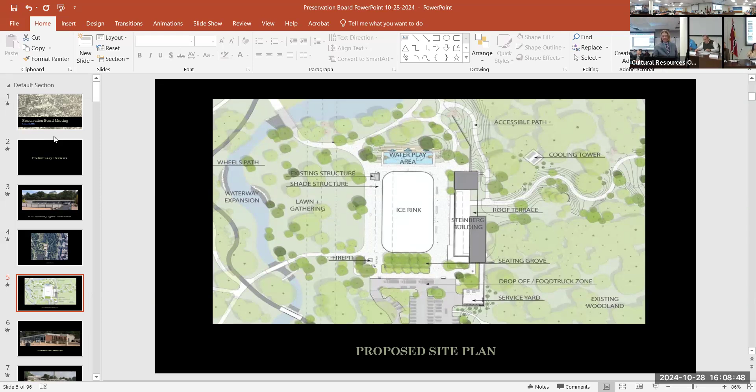Commissioners, do I hear a motion? I move that the Preservation Board grant preliminary approval to renovate the Steinberg Pavilion and surrounding site. Second. Any discussion? Hearing none, I'll call a roll. Commissioner Hammaker, do you vote yes or no? Yes. Commissioner Colleen, yes or no? Yes. Alderman Narayan, yes or no? Yes. Commissioner Richardson, yes or no? Yes. Chair votes yes, there are 5 yeses. It is approved. Congratulations.

Thank you all for coming. Thank you all for coming. I know.

Commissioners, we do not currently have a quorum present for agenda item B or C. I'm going to call agenda item D. D, D as in dog. As in dog. There, let me get you. Wait. So which, second? Let's see, we're here D, okay. Yes. Okay.

This is a preliminary review application to review the alterations and new construction proposed for this site at 4490 to 94 Lindell, also known as the Optimist International Club. As many of you board members will probably remember, this is far from the first proposal to reuse this building, which is a difficult concept in its floor plan and its site arrangement. But having said that, this is a building by Schwarz and Van Hoefen, and it was selected as one of the top 25 mid-century modern structures in the survey our office completed in 2013. So it's an important building, and its preservation is very critical to the Central West End and to the city as a whole. As I said, there were many other proposals for it that were unable to be successful. And so we are hoping that this one is different.

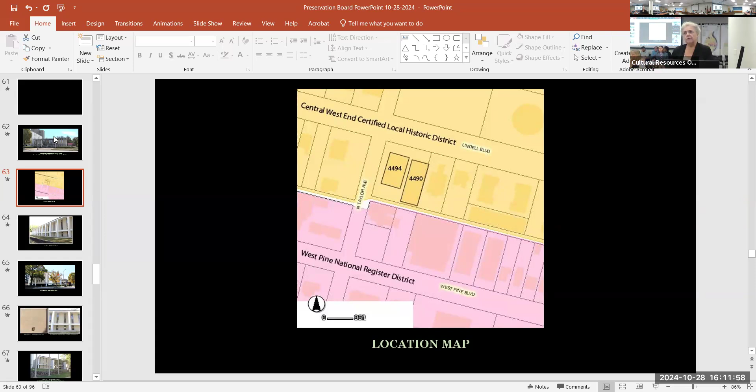But also having said that, I have to say that there are certain elements of the proposal that do not correspond with the Central West End Historic District standards, nor with the preservation review requirements, because this is in a preservation review zone as well. Let's see if I can hit the right button this time. Nope, I never can. This is the location. Now, the building on the right, which is 4490, is the tower, and that was built in 1978 and is not as distinguished as the original building at the corner at 4494. So its demolition is inconsequential.

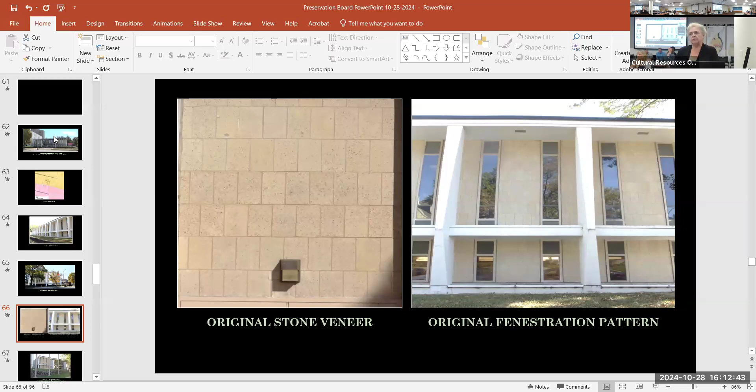The current building is sheathed in a stone veneer, and as you can see, the ribs are partitioned off individual bays with narrow slot windows. That's where the main alterations are going to happen, both on the front and on the west facade.

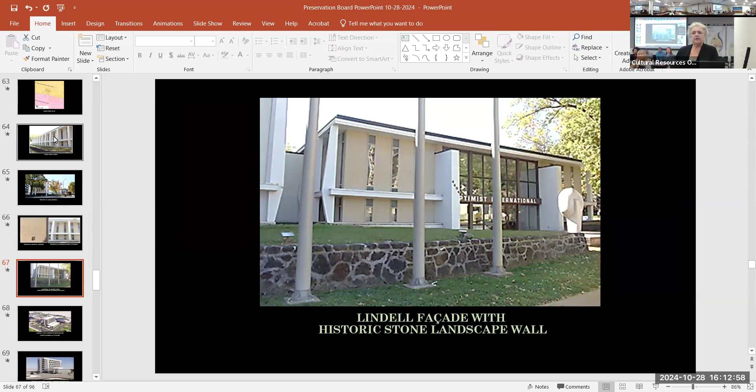This is the front. The stone wall that you see is consistent with the design, and parts of that will be retained in the alterations.

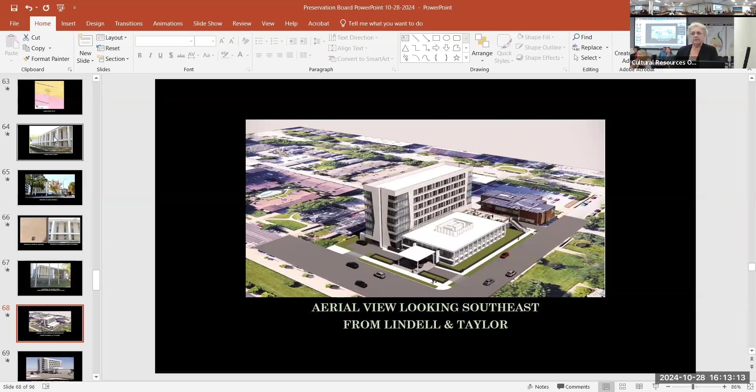I'm not going to dwell on these because the applicant has a presentation, but this is the proposal. It'll be a new tower on the east side of the property and changes to both the front and the west side, which are street elevations.

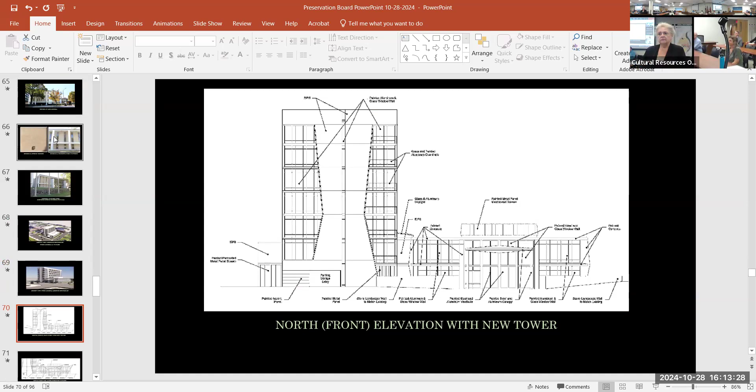I'm sorry these didn't copy very well, but what's proposed is to remove the wall space between the ribs and to glaze it instead. That would be on both elevations.

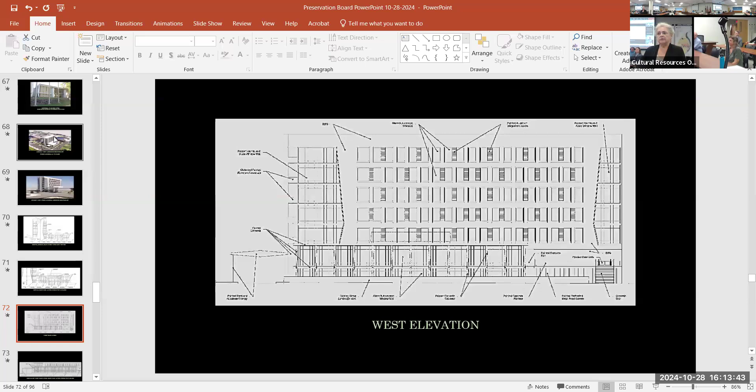So the staff is recommending denial because it really has to be under the standards as they are now. But we are supporting it as a critical means of saving this very important building. So it's a quasi denial.

Questions? And you go through the legislation. I'm sorry, will you go through the legislation in what way exactly? Does it comply, or doesn't it comply? Okay.

It's located in a preservation review district. The architectural quality is high merit. Its condition appears to be sound under the definition of the ordinance. The neighborhood impact, this is one of the strongest sites in the city, and it has many examples of mid-century modern with which this building is compatible.

Reuse potential, however, is not high, given the unusual conditions of the building itself. It was just built as a fraternity organization.

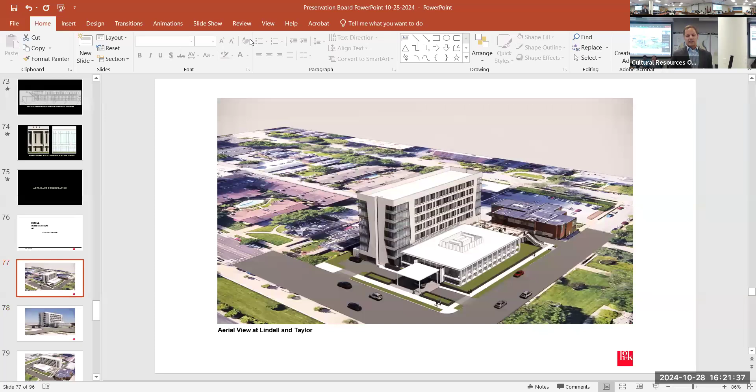So you have the pavilion, and the Cultural Resources Office staff asked us to look at some other things. The 2015 proposal had done some fritted glass, some different obscurities on the glass to replicate some of the void and solid of the current building.

We're simply replicating the pattern. I believe it's a 20 inch, 44 inch, 20 inch, 44 inch spacing between windows now. The window panels are 20, the spaces in between are 44. We're simply proposing to replicate all of that in the glass fenestration pattern, in the muntin pattern.

We did get a request to explore opacity, color, things like that, to further echo what was part of the original design. Where we landed is that it's better, purer. The simplest expression is the best expression. One color, two materials, as simple as possible, is closest to what we want to do, and closest to giving us the marketing message we want, which is mid-century cool.

Moving from that to the rest of the program.

I have a desktop, I don't know how these laptops work. There it is. It's got minimized. Yep, should be okay. Yep, we're good. No, it was paused. Okay, all right, yeah, okay, I'll touch nothing else.

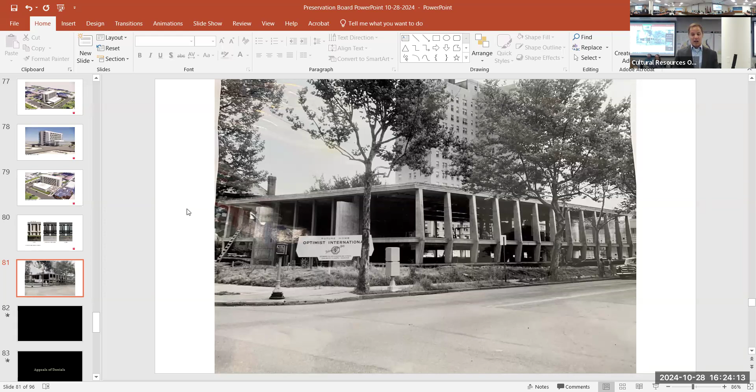So the pavilion is glass and concrete, two colors, the glass color and the concrete color on the raised podium. Then to the east of it, we're proposing a new tower building. It's 5 stick-built floors over 2 poured concrete floors, designed to be as efficient as we can get it.

From the street, because of how the parking is ramped, the parking ramps up from Lindell. Today there's a curb cut on Lindell that leads into a door in the front of the building, and the parking goes down from Lindell. We propose to use the same curb cut, put an opening into our building at approximately the same location, but ramp up, with another ramp down from the alley. That gives us 2 ramps, but it also gives us space at the front of the second floor for additional rooms. So even though it's technically 5 over 2 stick-built over concrete, it looks from Lindell like 6 over 1. We're getting 6 floors of guest rooms over 1 floor of garage from Lindell.

The design is meant to echo the painted concrete of the pavilion, but with sort of a modern take. It's kind of hard to see on the drawing, but where these shapes are cut into the white block, imagine this white block that we've cut some fenestration into, there is a dark colored edge, the rind, the architect calls it, that I think is very of the moment. This is a 2024 design. The angle detail on the facade is approximately the same angles as the colonnade around the perimeter of the original building. So I think it does a nice job of echoing components of the pavilion while still being a very today design.

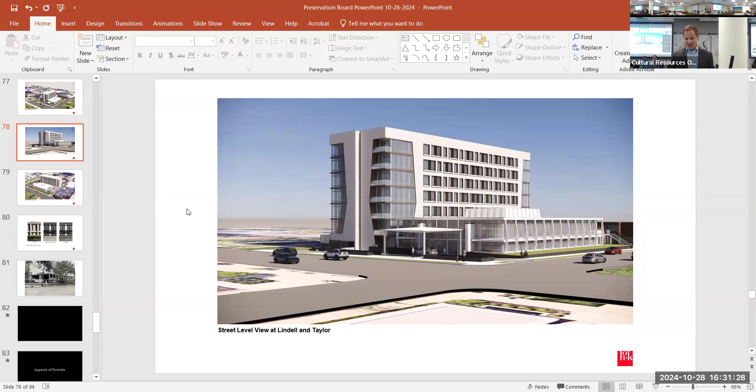Working around to the back of the building is an extension of the upper pavilion floor. Right now the floors penetrate the facade on 3 sides. The colonnade is outset from the facade, and the floors run out to it. That upper floor, we propose to pull out all the way to the alley on the back of the building, set back from the facade so there's no mistaking what's historic and what's not. That would serve as an amenity deck for the hotel, as well as outdoor dining for any food and beverage inside.

We placed a big staircase you see very prominently there. The lava rock wall shown actually turns at that location. We're proposing to leave the lava rock wall where it is now and erect this staircase going up to the raised terrace behind it. So we've got the pavilion, the tower, the canopy, and the terrace.

That's all I have, unless you have questions. Commissioners, questions?

So what's the deal with the stairs? They're for access to the amenity deck? Yeah, my thinking is that that'll be the main entrance to the restaurant.

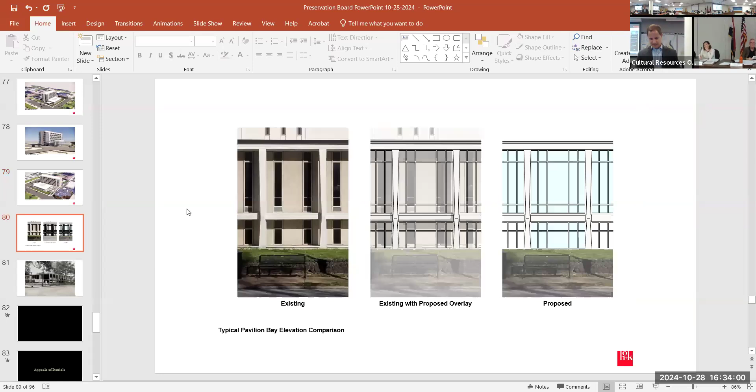So the first level underneath that deck is not part of the restaurant? Correct. Yeah, if you want to see that, I've got floor plans. Oh, maybe not. Yeah, I get it. It seems odd, so I'm just trying to figure out why. Oh, it's not here. Okay.

The lower level of the pavilion has rooms facing Taylor, guest rooms. And then on the other side of the building, facing into the tower, is just back of house space - the fitness center, laundry, and kitchen are on the lower level. There's a pantry on the second level to serve that upper level restaurant. It's logistically a little complicated, but seemed like the best way to get done what we want to get done.

The other question - I just want to confirm that the variance is necessary for the curb cut to create that front vehicle access. You've gotten those through with the form-based code. All variances we needed, there was the curb cut, and there was one for materials because neither EIFS nor curtain wall glass is an approved primary facade material.

And the use—hotel is not a permitted use. Those were all approved by the Board of Adjustment in September. Okay, thank you.

Do you have a flag for this hotel yet? Do you have a brand? No, it's modeled around—we had to understand what was possible in order to know whether there's a deal here or not. It doesn't make sense to design a project that doesn't make economic sense. So it was designed as a major chain soft brand. But I'm talking to people now who would do what they call a lifestyle extended stay. I'm talking to people who would do a completely independent hotel. We don't really know until someone steps up and says, let's do it.

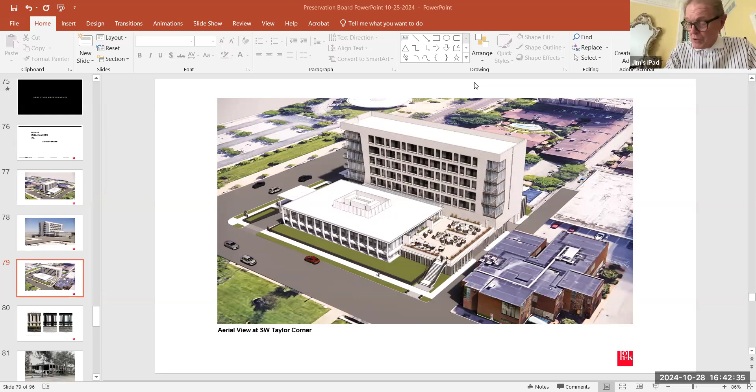We remain concerned about potential traffic issues resulting from the proposed introduction of a new curb cut on Taylor Avenue, shown in the middle of the rendering before you, middle left, immediately south of the Lindell Boulevard intersection. We encourage the developer to further consider providing vehicular access from Lindell instead.

What we're concerned about is that that's a point of ingress only. What we're imagining is that cars will be headed southbound on Taylor, intending to turn left across the northbound lane to enter the hotel property, thereby stacking cars up into the intersection at Lindell.

We do not have a specific proposal about how to address the issue successfully by coming in from Lindell, but we believe it's possible, and we think that investigation of it should be required.

So in conclusion, the committee recommends favorable action on this appeal, subject to final review and approval by Cultural Resources Office of permit drawings and specifications.

I want to take just another minute to extend compliments and appreciation to the Cultural Resources Office staff for their consistent application of the CWE Historic District standards and diligent efforts to preserve and enhance the district. We thank you for that. And that concludes my testimony.

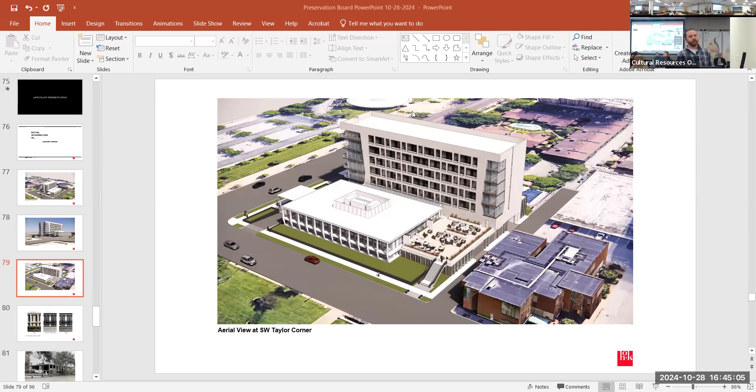The entire stretch of Lindell Boulevard between Kingshighway and Vandeventer has undergone several changes throughout the years. You have a combined streetscape of buildings starting around 1888 and going all the way up through the 20th century. Adding a new building in place of the 1978 addition would not significantly alter the streetscape in a way that it hadn't already been altered due to construction of other buildings during the mid-century.

The only concern that I would have is the eligibility to the National Register for the main pavilion building, because from the proposal, with removing the walls and adding glass and things like that, it appears that this building would no longer be eligible for the National Register. And for me, that raises some concern. So overall, I would think that at least part of the proposal is good, but it should probably go back to the drawing board to consider ways in which the National Register eligibility could be retained.

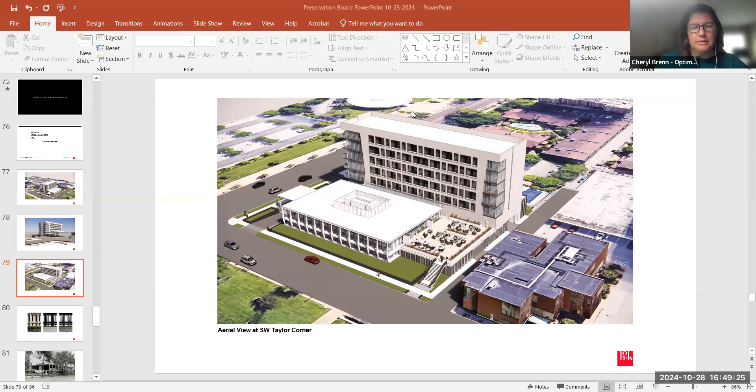Commissioners, this concludes the testimony. We have one more, sir. So we have one more. Hank Weber wants to speak. This better be about this project. This shouldn't be that 50-minute presentation you were going to give me earlier. No, it's about this project. I've been moved by this proposal.

Go ahead. My name's Hank Weber, a 16-year resident of the Central West End. I am a confirmed historic preservationist. We've renovated a historic house in the Central West End with the enthusiastic support of the CRO and their commission. I renovated 1 million square feet on the Danforth campus in my 15 years as chief operating officer at Washington University, and I've been by this site, I just estimated, about 3,000 times. And fundamentally, I support this.

I support it for three reasons. First, I think we face a real threat. This building has not been an asset to the Central West End, even under Optimus ownership, for recent years. As they noted, they have 20 employees on this site. This is not adding to neighborhood vitality, it's not adding to activity.

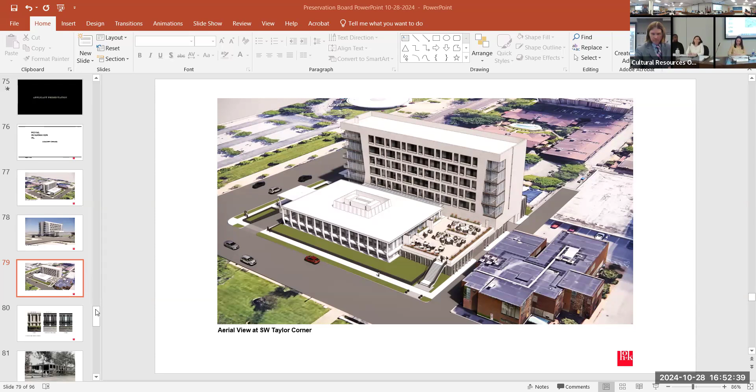Commissioner, a motion. I move that the Preservation Board grant preliminary approval of the proposed demolitions and alterations and building permit. Second. For discussion, we'll go to call on that. Sure, second.

Discussion, Commissioner Richardson? Well, I would add some further conditions to it, considering that it was basically granting a variance to the Preservation Review District standards because it doesn't meet most of them, and we're doing this because of neighborhood effect and reuse potential. So I would add that no demo permit or permit for alteration be granted until they applied for and paid for a building permit, until they closed on the property, until they close on their financing, and until they have a hotel franchise agreement or other evidence of a hotel operator for the project.

Sounds good to me. I don't know that I like the very last part about the hotel franchise. I'll second it -- and I've already seconded.

Oh, is that true? Well, I threw that in there because it's going to be a hotel, and I think it makes sense that it needs to get an operating permit, so a franchisee, or if it's an independent.

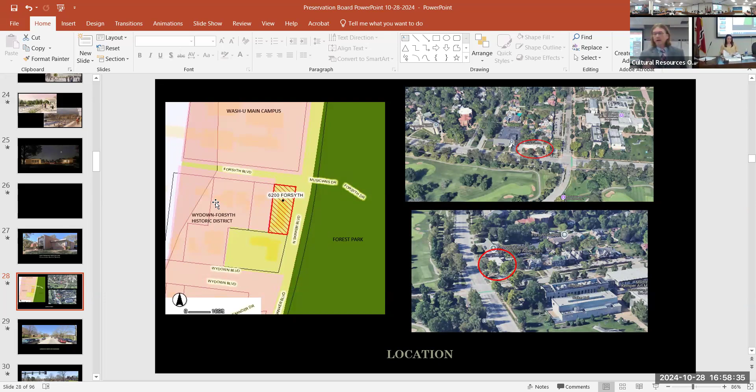It's right across from Forest Park. Looking west on the upper right, you can see looking down Forsyth. It's right adjacent to the campus to the south. Long row of buildings for the Forsyth School, which you all have a letter of support from, as well as a letter of support from Alderman Clark Hubbard for the project, for the site.

Some context at the street level, looking north on Skinker. The church in question is this one story building. There's an existing church to the south, and here's the site along Forest Park. Looking south on Skinker, here is the church in question. It has a service parking lot at the corner that served the former church. And then looking from the park west down Forsyth, this is the church in question.

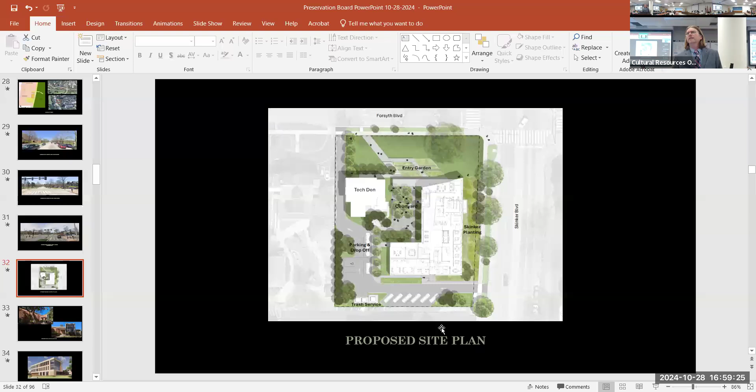This is the proposal. I don't want to get too deep into it, I'll just show you the stuff. They have a detailed presentation later, but I'll run through some quick slides here. This is the proposed site plan. It lines with the building on Forsyth. You can see the massing of the building.

It's a fine building, but overall, what's being proposed exceeds what we're losing. Staff please.

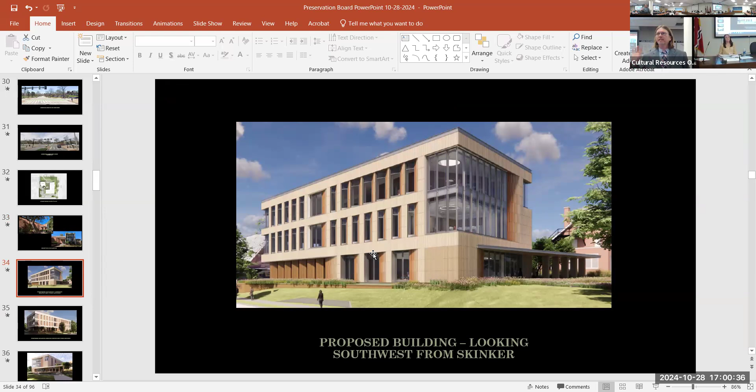This is the proposed building looking from Skinker to the southwest. I want to note the building material is terracotta and brick, so it's high quality materials, fits well with the site and the adjacent historic buildings.

Just looking northwest from Skinker. I want to say at the outset, this review has been around for a while. Jan and Meg, my predecessor, worked with the design team to craft the design to fit the site better. They were wonderful to work with. So this is an evolution of design that staff saw previously.

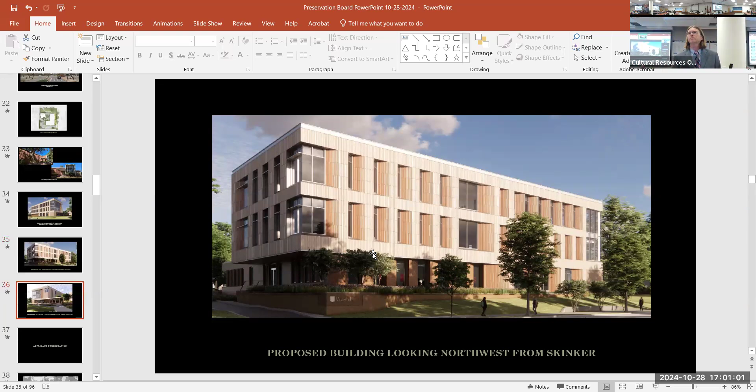This is looking from Forsyth. It's the entrance to the building.

Going to the ordinance, we believe that it complies with the majority of the PRD ordinance. The only thing it does not comply with would be zoning. This area is proposed to what's called a CUP, a community unit plan. WashU has a CUP for their site, and this will eventually be part of that CUP that is part of the university site. Speaking with zoning, they felt that since that's a pretty large overlay zoning, this step should come first, to make sure they're okay with the demolition. That will be seen later on down the line. So this building would comply with that overlay zoning.

So right now it does not comply. The plan is to amend the CUP to incorporate this site. Beyond that, it is also a sound structure under the ordinance.

You were all given a copy of a condition report from the applicant. It has some flooding issues, and some outdated issues with its services and systems. But overall, it's a sound building. We believe that it fits the site well. Again, we do contend that the loss of the building is exceeded by what's going to be built on the site. So staff recommends preliminary approval of the demolition and construction, subject to a permit being pulled and issued.

So any questions for me? Yep. Is the applicant present? Yes.

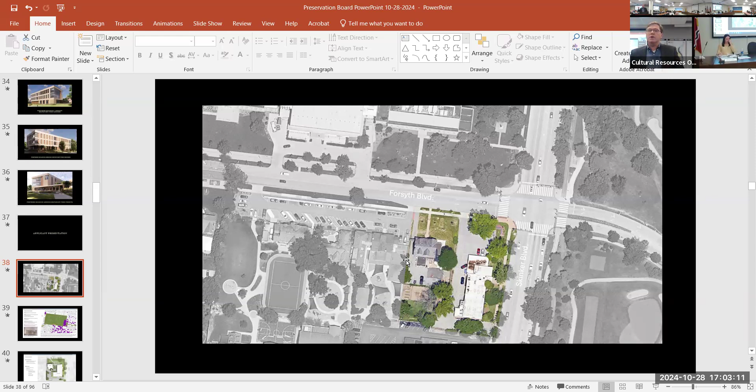We understand the sensitivity around Marcel Boulicault's project here. We do understand that in the mid-century modern survey, this project was passed over as a notable building. I just want to put that understanding out there, that we know lots of buildings were recognized, but this building was not part of that survey.

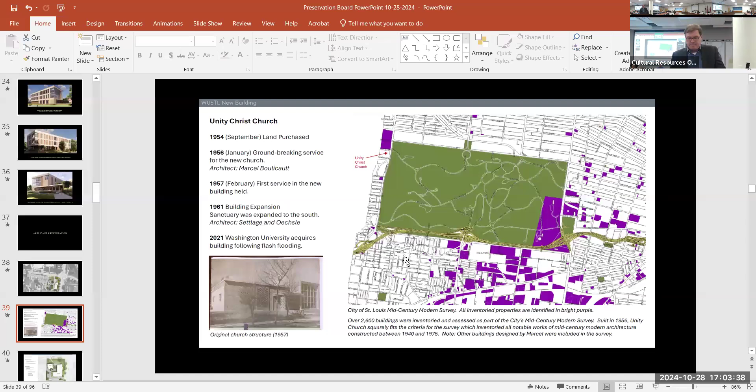So on the project, we're going to share consolidated property with the property at 6214 Forsyth. WashU calls it the Tech Den. We're not changing the use or altering that building at all. There's one thing we do have to do: there is a brick archway over the drive that is very limiting, very low. We can't get an emergency vehicle underneath it, or any kind of large vehicle at all. So we have to remove that from the project next to the Tech Den, but we're not changing the use or occupancy of it.

Our project is proposing to demolish the Unity Church that's on the site. This project will have administrative and student space in it, essentially office space and some meeting and conferencing rooms. There's also a courtyard between the Tech Den and the new building that will be used both informally, during lunch or during the day when people can work out there, students can work out there, and also occasionally for small events in the courtyard.

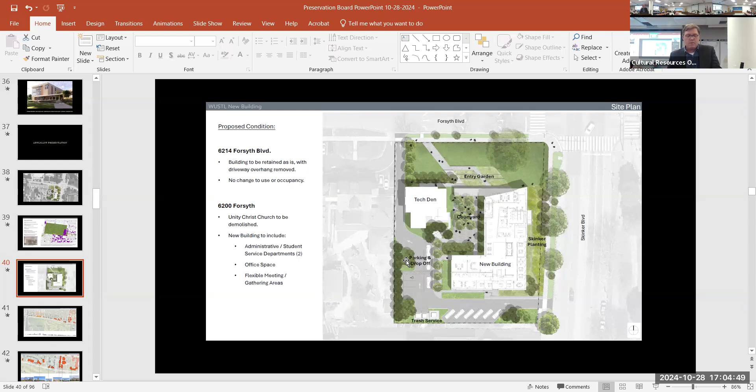When we designed this project, we really wanted to fully appreciate and understand how important Skinker Boulevard is to the city. That is the edge to the park. And as an edge to the park, it both defines the park but also becomes a window into the fabric of the architecture of the city.

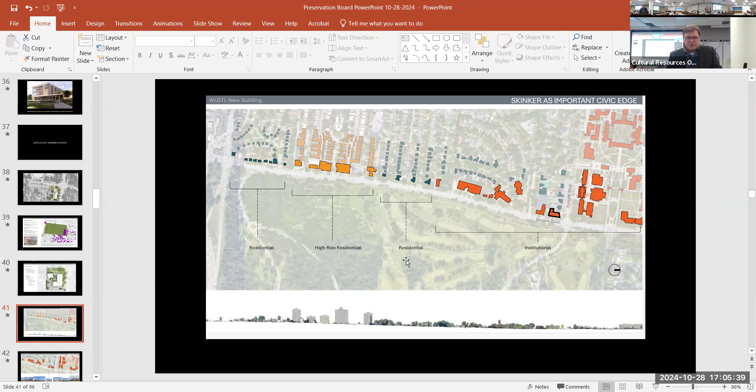This plan, which looks along Skinker, acknowledges that there are several different zones along the park. There's single-family residential, high-rise residential, multifamily residential in the DeMun area, and then a whole institutional zone along the park, and we're squarely in the middle of that. There's several churches, the Missouri Historical Society, Washington University, and our building sits among those. So really understanding that full context is important.

Our building also turns the corner, and on the backside, the west side, which is plan north in this plan, it's also residential. So our building is trying to ground itself in the institutional buildings along Skinker, but also acknowledge the presence of the residential scale and material palette to the west of it.

These are some photographs of the buildings that this building will sit amongst. You can see the Missouri Historical Society, the Memorial Presbyterian Church, the Seventh-day Adventist Church, which will be right next to us, and then Bixby Hall and the Washington University projects along Skinker.

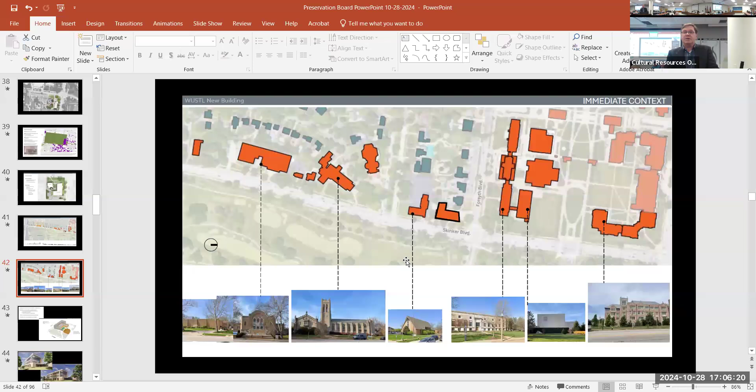We really wanted to do four things in terms of how this responds to the city. First of all, we wanted to create institutional stature to the building.

This is an important 100-year building for WashU. We wanted to make sure it has the stature of an institutional building, but also we wanted to bring the scale down. We noticed in several of the buildings, the Presbyterian Church for instance, it's got a significant presence, but also when you get close to it, there's detail that's rich and inviting and humane and welcoming. We wanted to do the same thing.

We also really wanted the building to be of its own time while relating to buildings that preceded it, so really wanted it to be of its context. That's both material quality and appearance, but also this is a highly sustainable building, responding to environmental pressures. We wanted it to be of its time in that it's responding to the environment in a very serious and responsible way.

And then finally, we really wanted it to become an asset on Skinker, continuing that institutional edge to Skinker that makes it vibrant and gives St. Louis character.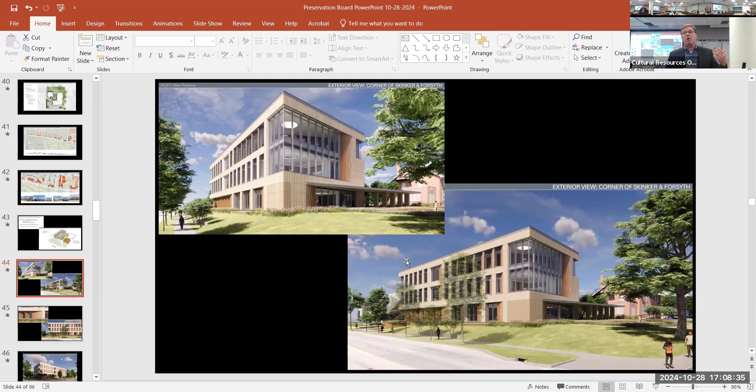As Bob mentioned, the palette is terracotta, which has historically been used quite a lot in St. Louis. It's a clay product like bricks, so it relates naturally to the brick palette you see in St. Louis. Just down Skinker, several of the high-rise buildings have terracotta at the base, and what's remarkable is when you go look at those bases, they look as if they're 10 years old. Terracotta performs extremely well, it's very durable, and we think it's an appropriate material that can respond to the limestone and brick in coloration and substance on Skinker, but will last a long time.

We're also using brick. There's a one-story piece that relates to the scale of the former residences on our property and the other residences nearby — that's the tail that comes around. That's a brick piece, and we're using iron spot brick. You'll see in a bit some details that show both a sense of care with the use of brick, not just developer brick but institutional quality detailing, and also harken back to the original building that had a brick screen in front of it.

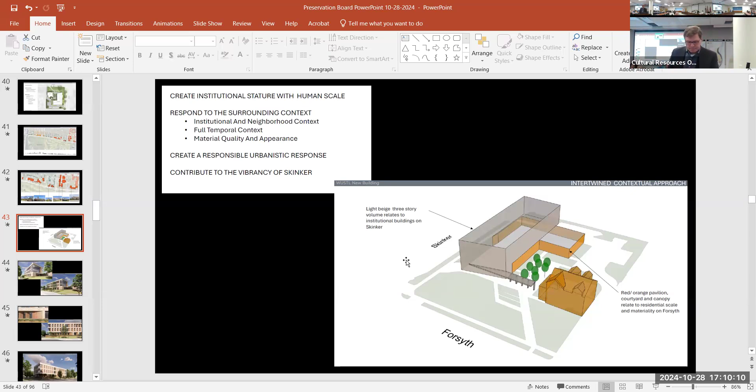And then you can see in the brick how it's coursed, which harkens to the overall strategy of the fenestration of the building, where the bricks are kind of angled into the facade.

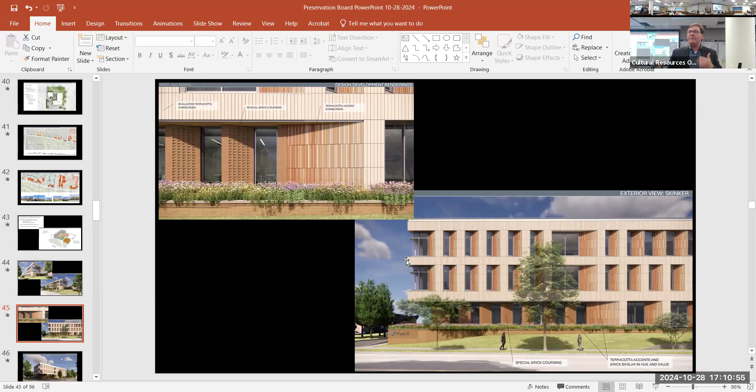At the edge, we have to retain some earth, so there's a brick retaining wall. There'll be some signage there, and a planting bed along the edge of the building. This is the view looking towards the northwest, where we have a larger conference room, some corner windows, and a service entry on the backside.

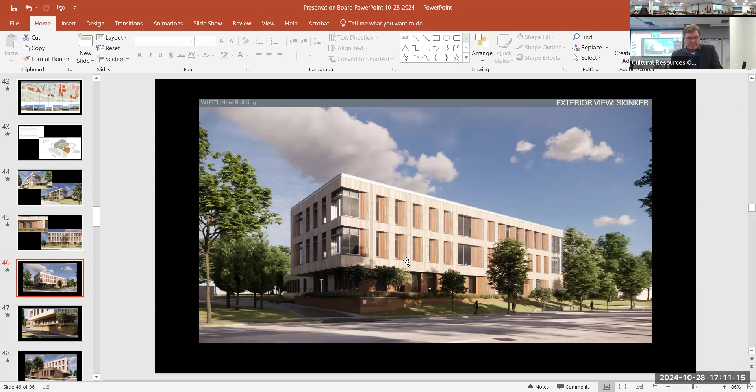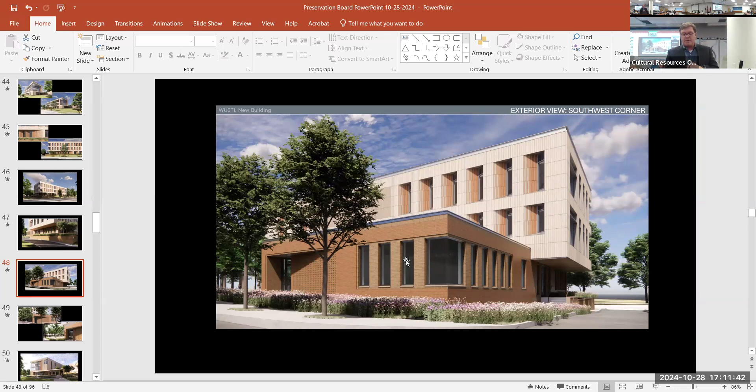Just a close-up of some of the brick detailing and coursework. This is swinging around—we're inside the site. There'll be a drop-off here, a secondary entry to the building, and you can see the one-story brick volume sliding out from underneath the three-story building. Some more views of the brick detailing. There'll be a lovely garden in the middle with a bosque of trees.

This is really where most people will enter the building, coming from the campus. The whole entry is oriented back towards the university, and the front of the facade is angled back to the university for two reasons: one is to improve the solar orientation so you can have nice clear glass without penalty from solar heat gain, and also the people in those rooms will have a view right back to Brookings Hall and the greater university.

There's a canopy that welcomes you to the building, but also softly contains the courtyard behind it, and pulls you into the front entry. And that's all I've got to show you.

Are there any questions, commissioners? One question—the logic behind putting the pedestrian path this way, angling the facade west, actually angles pedestrians away from the crosswalk. I'm just curious about the thought on that, because this is angling them further from the Lindell side.

Right, so people are not coming from the park—they are coming from the university. The majority of people are actually coming from the west, in fact about 99% of the people coming to this building are coming from the west. And the university wants them to park at the university, not in the park.

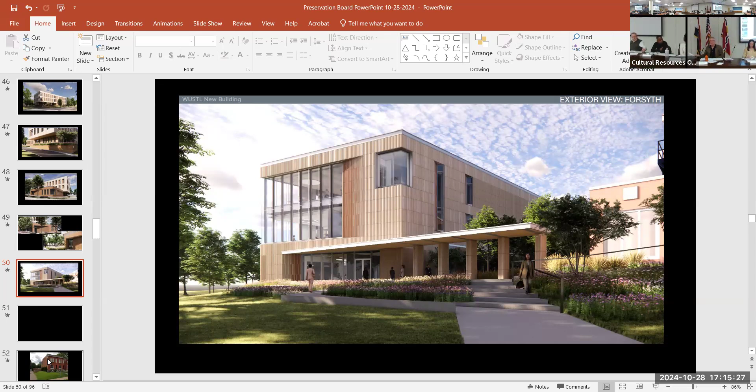I don't have anybody on my sheet for agenda item C. In the grid, I have it here. No, Max is online, the architect is online. Max, are you awake? Yep, I'm here. Max, yeah, Max, your architect is online. Commissioner, we're going to take a 5-minute break. All right, sorry Max, 5 minutes. Okay, back to bed, yes.

Yes. Right now. So. Yeah, so don't—you're gonna go the other one now. Normally.

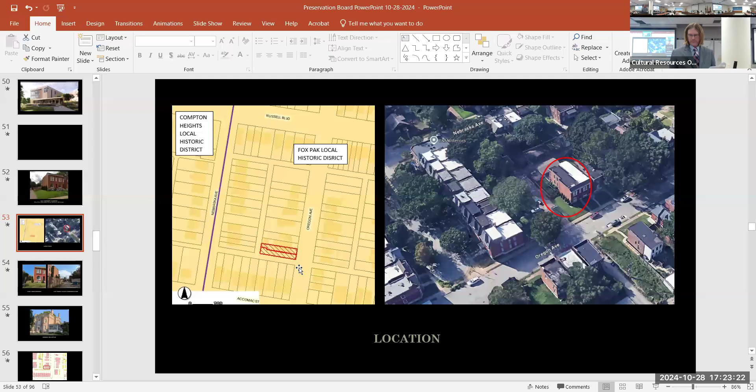So here's the location. We're just to the east of the Compton Heights Local District, which is Nebraska, the dividing line. And we're here at the alley on the west side of Oregon, south of Russell. And here's an aerial shot showing the parcel. Here's the view from the street. Again, you'll see a shot showing the proposal of this area.

And it's the alley looking towards the street. This window right here, you can see it. This is actually one of these two—it was actually a door at one time. Historically, there was a porch back here when there was a building that was placed here. So there was actually a porch and there's a door at the side.

So when the design came in, we suggested they try to find an example of an existing frame porch as a basis for the design. Driving around the area, they went next door to Compton Heights and found some precedents for having one-story side porches. This is one - even though it's a grand, high-style building, the concept idea of having this is out there. This is the 1909 Sanborn.

This shows you the building. It was there, so yeah, there's the cutout you see. But this was long ago demolished. Kind of cool.

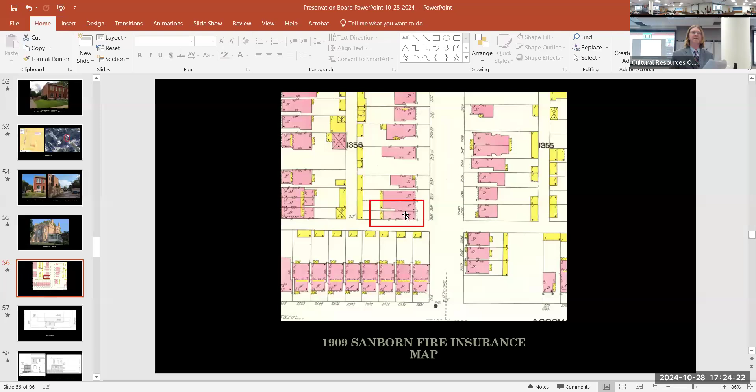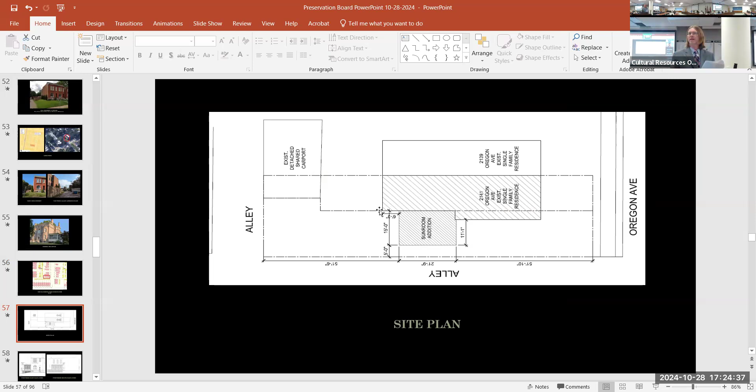So this is the site plan, the proposed addition. See, it'll come off where the building sets back, comes out about 11 feet, and goes back near the rear of the property. This is the view from the street looking back.

We kind of minimized some of the really high style elements you see on the side porch, asked for better materials, and tweaked things like adding a lattice screen and a frame at the bottom, which you would see a lot of times. Given that odd slope that's there, having a heavy masonry foundation would look a little different, and porches like this would often have a lattice screen. But overall, fenestration lines up with the first floor.

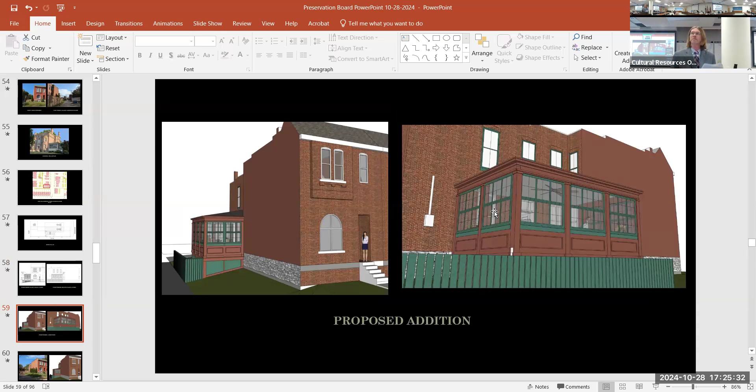You did receive a letter from Fox Park supporting the request for variance, given a few conditions. They want to make sure the southeast facades will be detailed in the same materials and configuration regardless of the proposed fence condition. The concern is the fence is blocking the lower portion of the addition, so they'd like to see the lattice screen carried over to this side as well. They want to make sure CRO does the usual detailing to ensure compliance.

That would be in your motion - if you choose to approve it, you can stipulate that you work with CRO on the finer details. They want to make sure the windows in the front are compliant with section 203 of their ordinance, having simple double hung windows.

I was unaware, and Max maybe can elaborate on this - there was a possibility of having really large double hung windows here, Max. We can probably get into that in a minute, but they just want standard, simple double hung windows along here. And then also they mentioned the lattice we've discussed before.

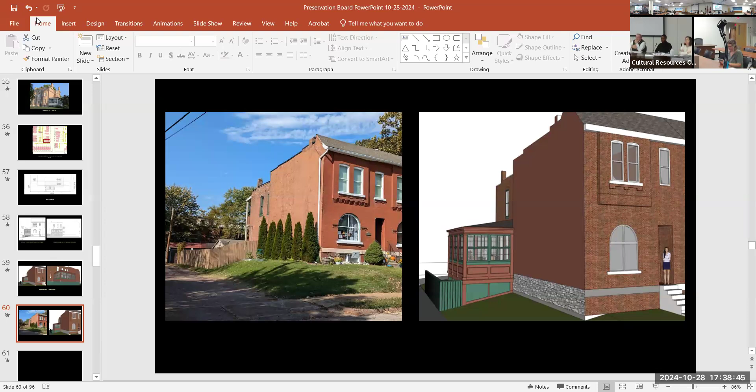So that part's possible. What got me is the neighborhood standards—they wrote them saying it should have a flat roof, right, and a parapet should be a little taller. It should have a flat roof. This building has a flat roof. I think the design should have a flat roof. And I agree with that.

The motion on the floor has been made and seconded. Any further discussion? Hearing none, I'm going to call a roll. Commissioner Hamilton, do you vote yes or no? Yes. Commissioner Trellini, do you vote yes or no? Yes.

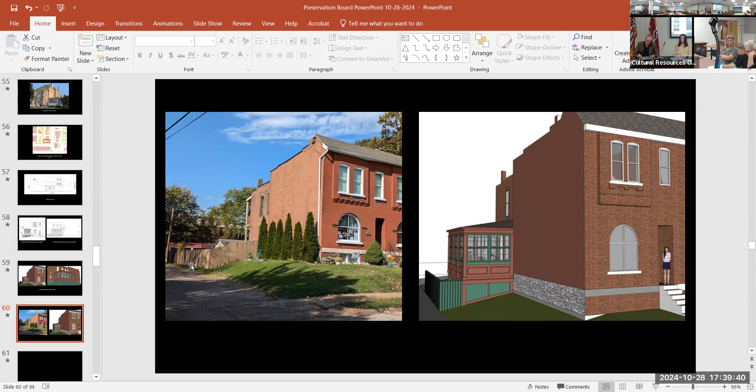Commissioner Richardson, do you vote yes or no? Yes. Commissioner Robinson, do you vote yes or no? Yes. Chair votes yes, there are 5 yeses. The motion carries.

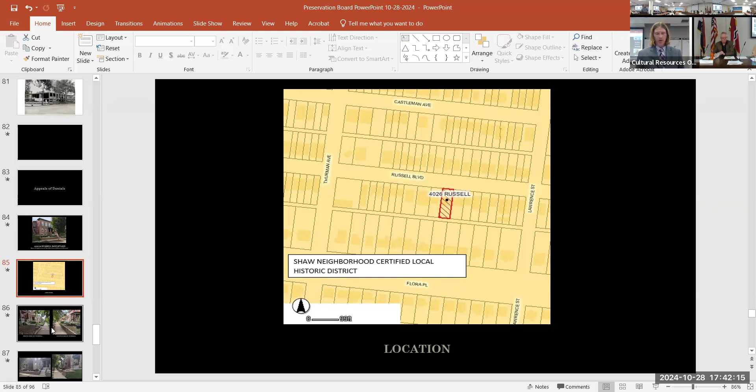So this is the site, just in the middle of the block between Thurman and Lawrence. I will say, at street level, this block of Russell does have several retaining walls on it already. I've looked into them, and I didn't see any that were approved by us or received a variance. So these are walls that have been around for a long time, or were put up and were not noticed over time.

This is a detail of the current wall. Are these two walls, right? They're two walls. We're calling it one wall, but they're two separate walls. This is the current condition. Walls were constructed and they were landscaped. This shows you the site previous and the current condition.

You do have a letter of support from the Shaw Neighborhood Improvement Association. They are in support of the applicant's request for a variance. But staff recommends that the board uphold the denial of the permit because the wall is not compliant with standards. Any questions for me? There's been some spirited discussion with the neighborhood. I'm going to go talk to the Shaw group in the coming months. They're having discussions about how they want to address their own code, so I will note that's ongoing.

In any discussion we've overheard, or any discussions with the appellant, do you have any clue as to what the reason for the variance might be? From the applicant himself, no. They just want to keep it because they put it up and expended the money on the project. I believe they said it's also a north-facing slope, so it doesn't get enough sun, they can see that. So there are several reasons why they support it. They also said there are several similar walls in the area already, so that's why they see it as okay. So they went without a permit. Correct.

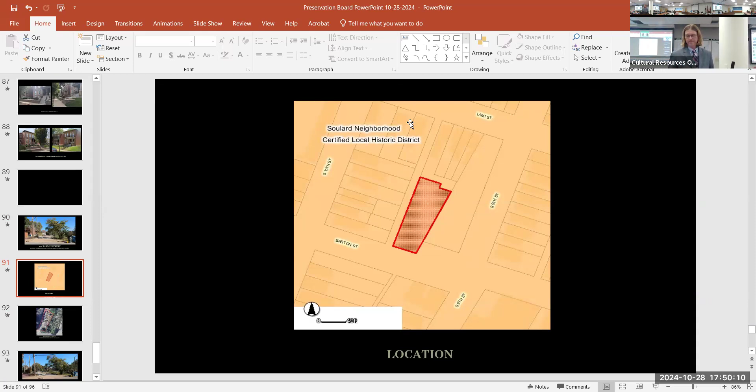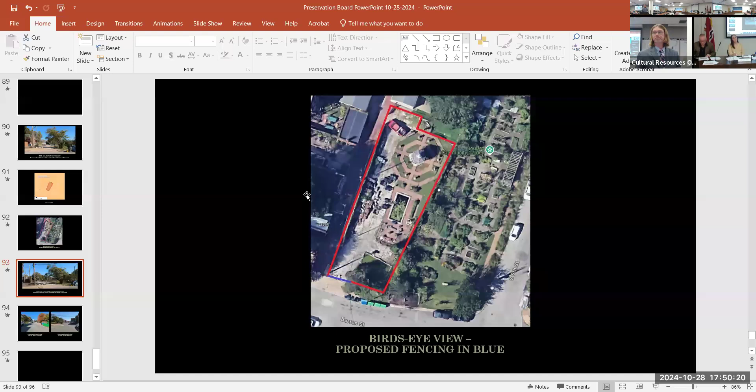So quickly, here's the parcel. The owner lives kind of over this way, up towards Lami. This is a bird's eye view of the site, and the fencing you see is down here, but the rest is already chain link. Another shot of the fence, shot of the site. Context looking to the west, the site's right over here. And again, this is the site looking this way, to the east on Barton.

So again, that being said, chain link fencing is not allowed at public facades, that's why it's not compliant. You were given a letter from the SRG's Historic Code and Zoning Compliance Committee, who did not support the request for a variance, so you do have that on record. We do not have anything from the elected official on the site. Any questions? I recommend that the board uphold the denial of the application.

Is that right next to the community garden now? It is. I always thought it was part of it. That was our confusion as well, and that was clarified as the gentleman came in this evening. I want to make sure it was, they're two separate. Okay.

Further questions? Please. Black metal, at 4 feet. 4 feet black metal. So, but...

Basically, there's a chain fence around the entire site. Correct, it's been there for a while. There used to be a compliant gate at one time, which I believe was stolen. We can tell you about that. There actually was a chain link fence at one time there, but it was also taken. Thanks, Bob. Okay, let's hear from the appellant.